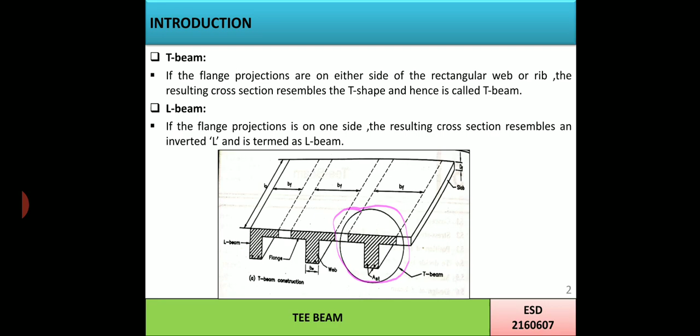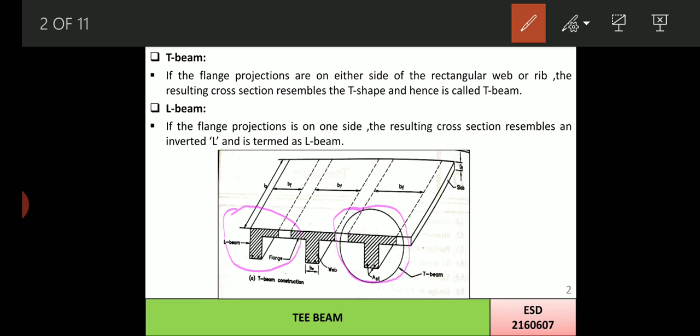Now talking about L-beam, if the flange projection is on one side only, the resulting cross section resembles an inverted L, and it is termed an L-beam, highlighted here. In other words, all intermediate beams are known as T-beams, while all beams provided at the corner are known as L-beams.

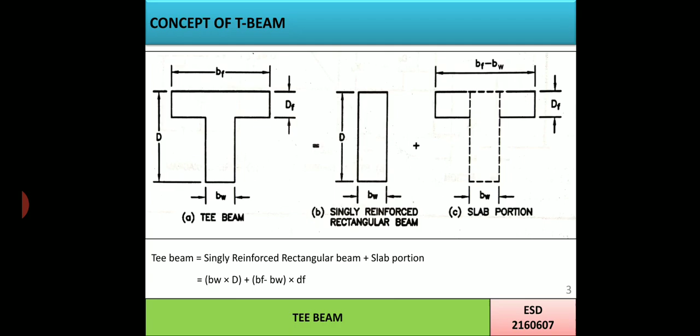Now, concept of T-beam. We should understand that a T-beam is nothing but the combination of a singly reinforced rectangular beam plus a slab portion. As we can see, this is the typical singly RC beam, and this is the slab portion. Now if we combine these two, it will ultimately become a T-beam.

Now talking about T-beam dimensions: BF is the width of flange, DF is the depth of flange, capital D is the overall depth of beam, while BW is the width of web or rib. Now let's talk about the formula for that.

Now for this singly reinforced rectangular beam, if I want to find its formula, it will be simple. As it is a rectangular portion, its area will be D multiplied by BW, as we can see here.

While talking about the slab portion, since the central portion is deducted from the slab, the overall dimension was BF. Now the central dimension BW has been reduced from it, so the remaining length will be BF minus BW multiplied by DF, as shown here.

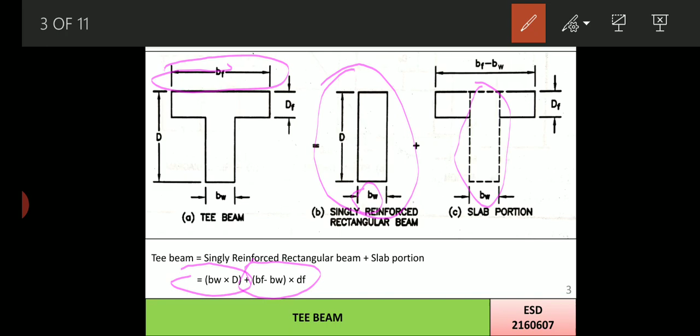So to understand the basic concept of T-beam, the formula for the overall T-beam equals the singly reinforced rectangular beam plus the slab portion. The formula will be D multiplied by BW, that is the beam portion, plus BF minus BW multiplied by DF, that is the slab portion.

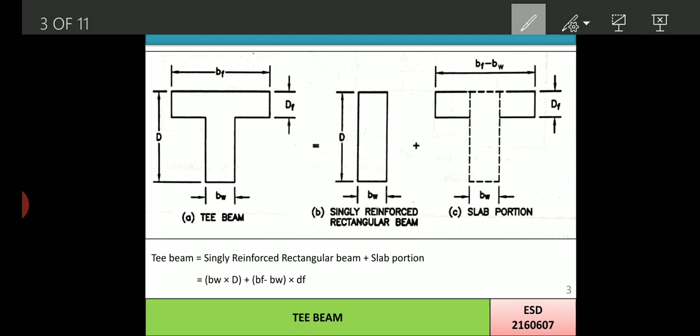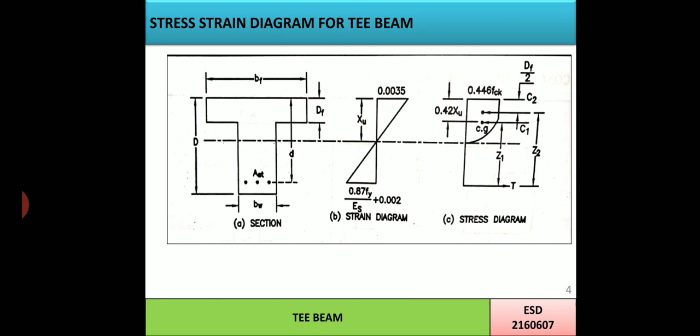Now, stress strain diagram for the T-beam. As I said previously, T-beam is the combination of a singly RC beam plus slab portion, so the strain and stress diagram will also be similar to the singly RC beam. Talking about the strain diagram, it is exactly the same as that of a singly RC beam, as T-beam is a combination of singly RC beam plus slab portion.

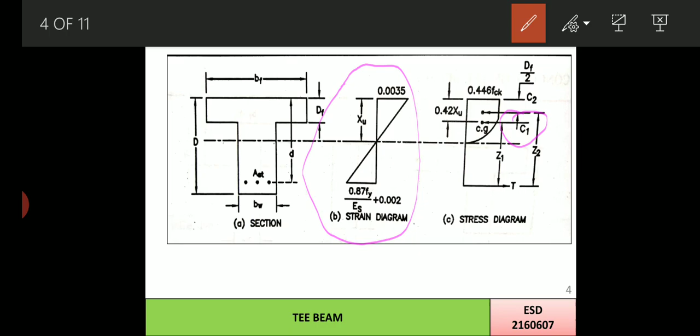Now talking about the stress diagram, first of all force C1. Since C1 is the compression force of the singly RC beam, it will act at the same place, at 0.42 XU from the top of the beam. Force C2, the compression force acting in the slab portion, will act at the center of the slab, at depth DF by 2 from the top.

As there are two compression forces, C1 and C2, two lever arms will be generated, Z1 and Z2. Talking about Z1, the overall effective depth small d minus 0.42 XU gives us Z1. Talking about Z2, overall depth d minus DF by 2 gives us Z2.

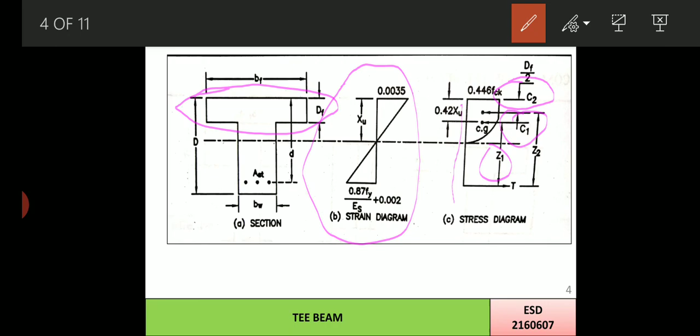Now the notation of the diagram that we already discussed: BF width of flange, DF depth of flange, BW width of web, small d effective depth of beam, capital D overall depth of beam, AST area of steel, XU depth of neutral axis, C1 force of compression in concrete of the beam portion equals 0.36 FCK BW into XU, C2 force of compression in the slab portion.

C2 equals 0.446 FCK into BF minus BW into DF. T is the force of tension in the steel, equal to 0.87 Fy AST. Z1 lever arm equals small d minus 0.42 XU, Z2 equals small d minus DF by 2. FCK is the compressive strength of concrete, while Fy is the yield strength of steel.

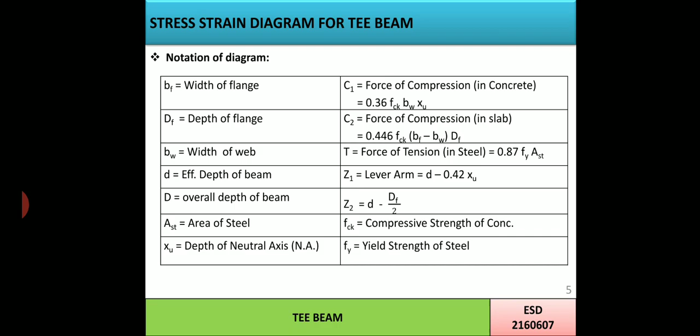Now talking about neutral axis. Before getting into the content of neutral axis, we should understand the two forces that make a bigger impact on the position of the neutral axis. Those two forces are, first, Fc, that is force of total compression, 0.36 FCK BF into DF, while the other is force of total tension, that is 0.87 Fy AST.

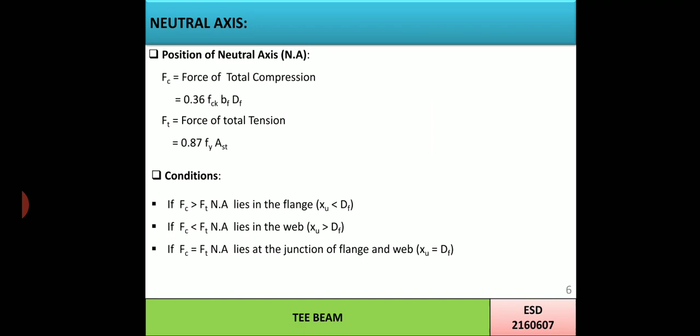Now talking about the condition of where the neutral axis will lie in the T-beam. So first let me draw a cross section of the T-beam, say this one.

Now talking about the first condition, if Fc is greater than Ft, the neutral axis lies in the flange. So if the neutral axis lies in the flange, it will pass over here, something like this. Now this depth is known as Xu, and DF is this depth. From the figure we can easily understand the condition will be Xu is less than DF.

Now talking about the second condition, let me draw a T-shaped diagram again. The condition says that if Fc is less than Ft, the neutral axis lies in the web. So from over here the neutral axis will pass. This depth is our Xu and this one is our DF. From the figure we can easily understand that Xu is greater than DF.

Now talking about the third condition, again let me draw a T-shape first. If Fc equals Ft, the neutral axis lies at the junction of flange and web, meaning it will pass over here where flange and web meet. This one is our Xu, while at the same time this one is our DF also. So from the figure we can easily get that Xu equals DF.

So friends, hope you got the idea of where the neutral axis will lie and how the conditions are generated using the figure.

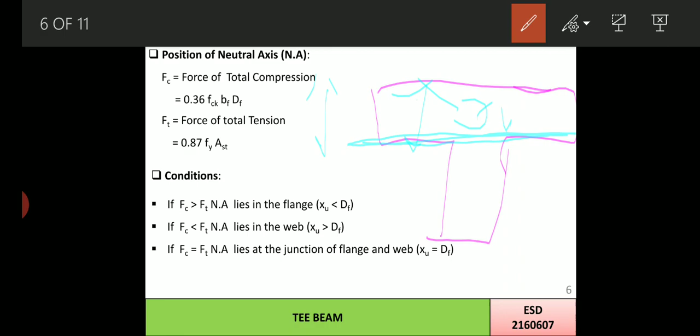Now depth of neutral axis is also one of the variables, as we already discussed the different conditions of Fc and Ft. If Fc is less than Ft, the neutral axis lies in the web, that is the second case. If this condition arises, we can find out Xu using the formula C1 plus C2 equals T, where C1 is 0.36 FCK BW into Xu, C2 is 0.446 FCK BF minus BW into DF, equals T, that is 0.87 Fy AST.

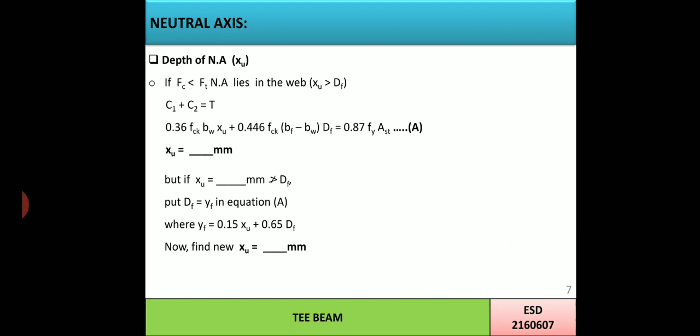In this formula Xu will be unknown and we can easily get its value, but the Xu we deduce from the above formula must be greater than DF. If it is not greater than DF, then we need to find the new Xu by putting YF equal to DF in this formula. YF is used instead of DF, where YF equals 0.15 Xu plus 0.65 DF. By using this formula we will get a new Xu that will definitely be greater than DF.

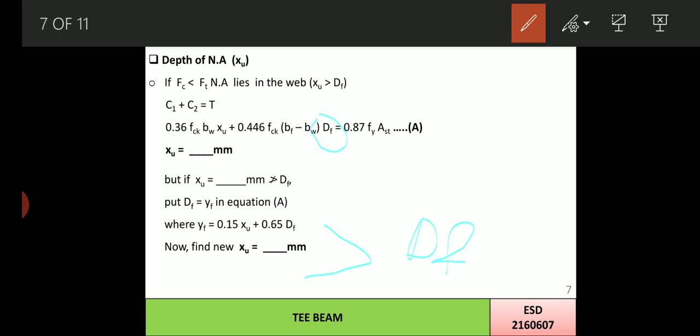Now, flange width. Sometimes flange width is not given in the data, so for that we can find flange width using the IS code. Flange width of the T-beam can be found as BF equals L0 by 6 plus BW plus 6DF. It is given in IS456, page number 36-37, clause number 23.1.2.

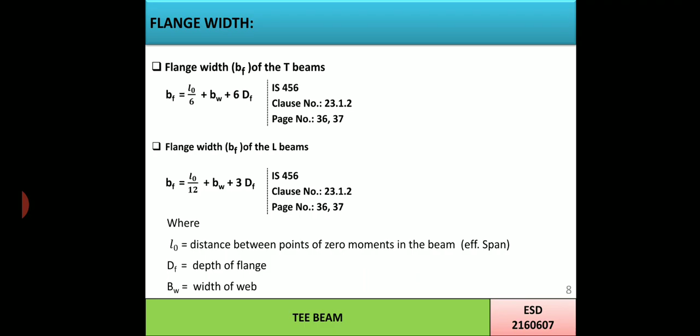Similarly we can find the flange width of an L-beam using the formula BF equals L0 by 12 plus BW plus 3 into DF, also given in the same clause. In the above formula there are some unknowns, where L0 equals the distance between the points of zero moments in the beam, in other words the effective span. DF is the depth of flange and BW is the width of web.

Now talking about the basic concept of T-beam analysis. First of all we need to understand the two basic conditions of Fc and Ft, as we already discussed in the previous slide, Fc and Ft, say this one.

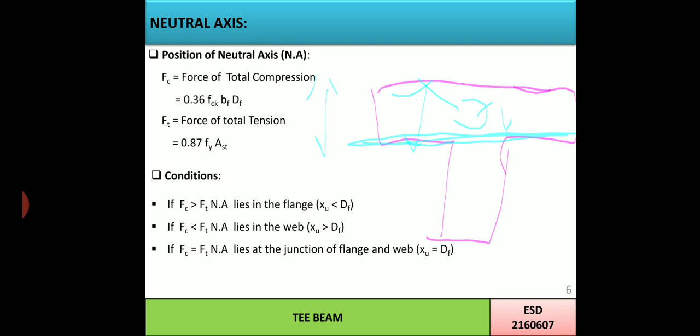This one is Fc, this one is Ft. First of all we need to find out these two forces using the formula Fc equals 0.36 FCK BFDF, and Ft equals 0.87 Fy AST.

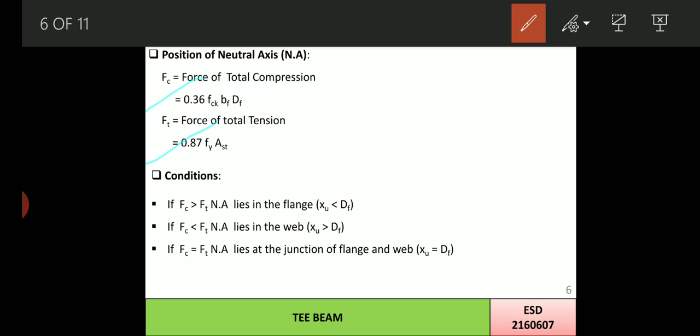Now coming over here, talking about the first case: if FC is greater than FT, we have already discussed in the previous slide that if FC is greater than FT, then the neutral axis will lie in the flange.

So ultimately we can find out the moment of resistance of the beam using the concept of singly reinforced beam. Now XU can be found out using this formula, given in IS 456 on page number 96, clause G1.1a: XU equals 0.87 Fy AST upon 0.36 FCK BF. The value of XU should be less than DF, and we find XU max, which is also given in the code on page number 70 notes.

Once we get the value of XU and XU max, we can find the moment by deciding the section of the beam: balanced section, under-reinforced section, or over-reinforced section. All the moments are there. If under-reinforced section is there, we use formula G1.1b, and if it is over-reinforced or balanced section, we use formula G1.1c to find the moment of resistance.

Now this was the case of if FC is greater than FT. Now talking about the other case, that is if FC is less than FT, say this one. So for that one, the neutral axis needs to be found out.

First of all, the neutral axis will be in the web, so we can find the value of neutral axis XU using the formula C1 plus C2 equals T, and the value of XU which we get should be greater than DF. If it is not greater than DF, then we find the new XU by replacing DF by YF, then find XU max, as per the code on page number 70 notes.

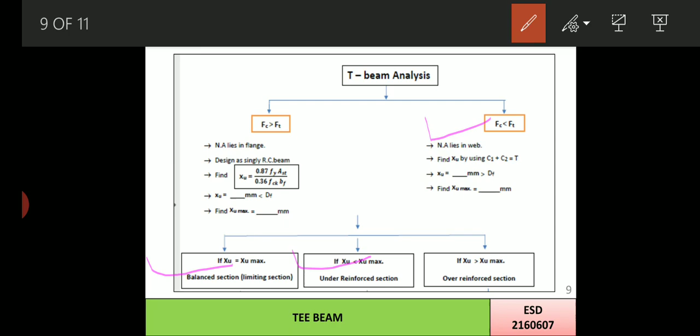Once we get the value of XU and XU max, as I already said, there are three possibilities for the section: if XU equals XU max, it's a balanced section; XU less than XU max, under-reinforced section; and if XU is greater than XU max, over-reinforced section.

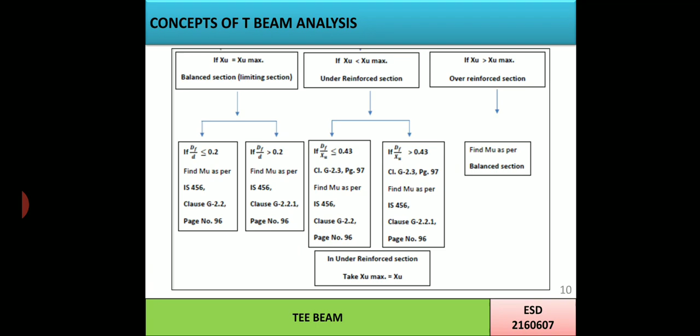So on the basis of these three conditions, we can find out the moment of resistance using the code. Now talking about the first condition, that is the balanced section.

As per IS 456, if balanced section comes, we can find the moment of resistance using two different formulas. First we need to find the ratio of DF by D. If DF by D is less than or equal to 0.2, we use clause G2.2, page number 96. If the ratio of DF by D is greater than 0.2, we use clause G2.2.1, page number 96, and the moment of resistance can be easily calculated. So this is the case of balanced section.

At the same time, if over-reinforced section comes, we use the same procedure like balanced section. Now talking about the other section, that is under-reinforced section. As per IS 456, clause number G2.3, page number 97, we can find the moment of resistance using two different formulas.

For that, which formula to be used? First we need to calculate the ratio of DF by XU. If DF by XU is less than or equal to 0.43, we use the same formula, clause G2.2, page number 96. And if the ratio of DF by XU is greater than 0.43, we use the formula G2.2.1, same as this case, but in both above cases we replace XU max by XU.